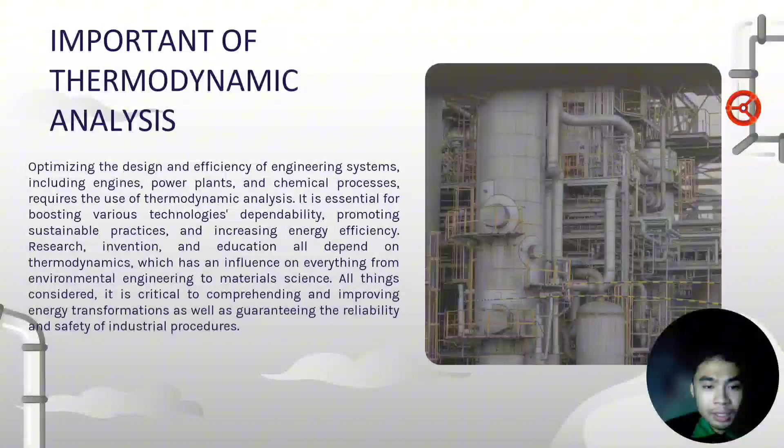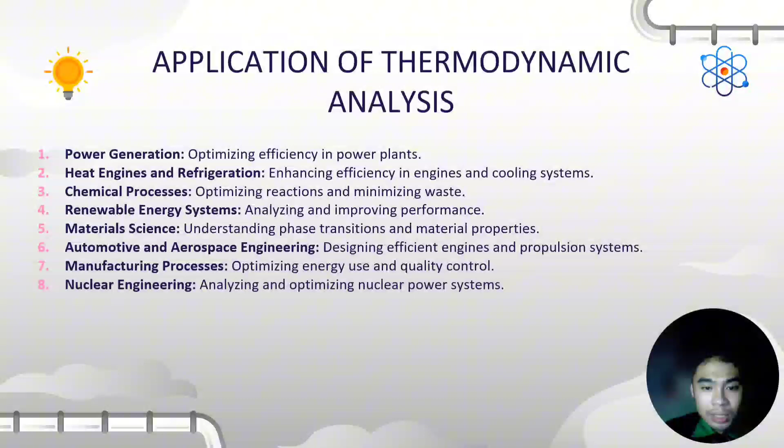Next, automotive and aerospace engineering, which is designing efficient engines and propulsion systems; next, manufacturing process, which is optimizing energy use and quality control; and lastly, nuclear engineering, which is analyzing and optimizing nuclear power systems.

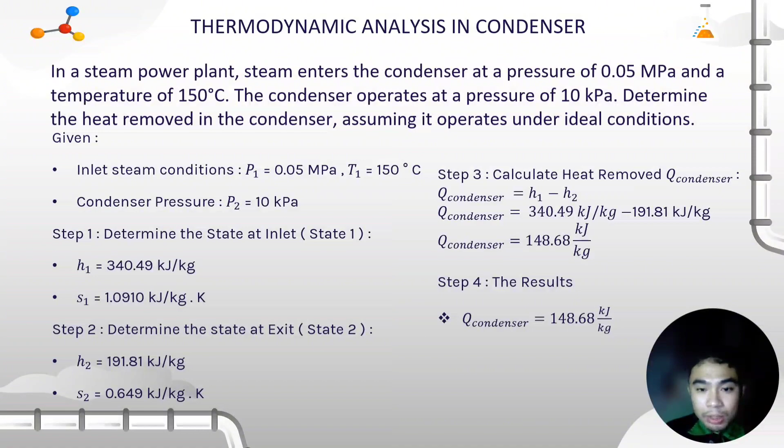Next, for step 3, calculate the heat removed, which is the Q condenser. Q condenser is equal to H1 minus H2, and we will substitute the values that we get at state 1 and state 2, which is 340.49 kJ per kilogram minus 191.81 kJ per kilogram, and the final answer is Q condenser equal to 148.68 kJ per kilogram.

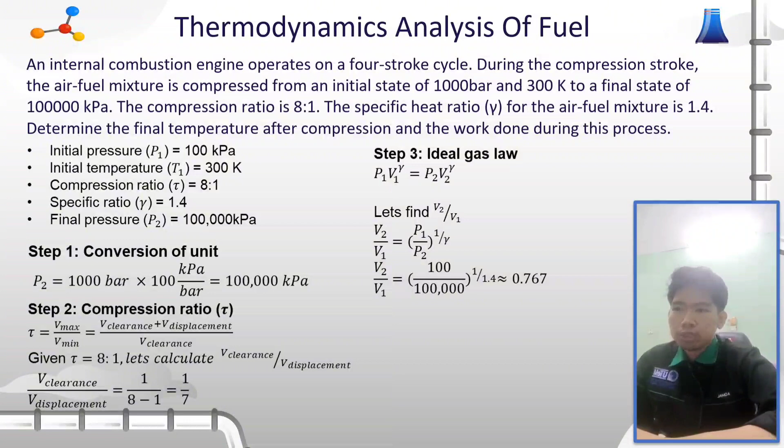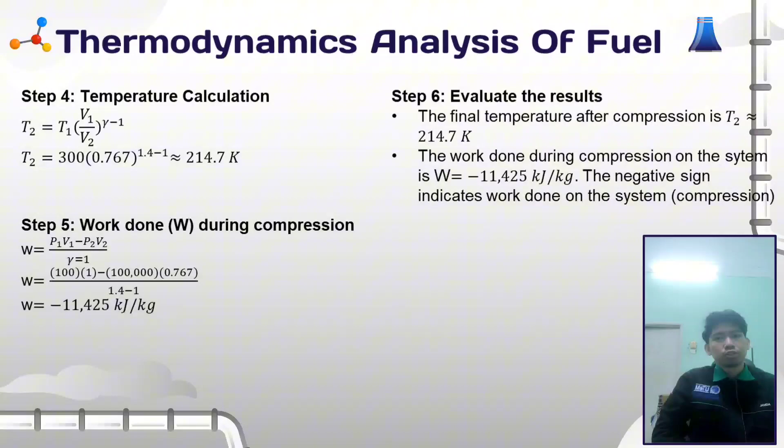Hello, my name is Muhammad Sulaiman. Now I want to present an example question of thermodynamics analysis of a feed water heater.

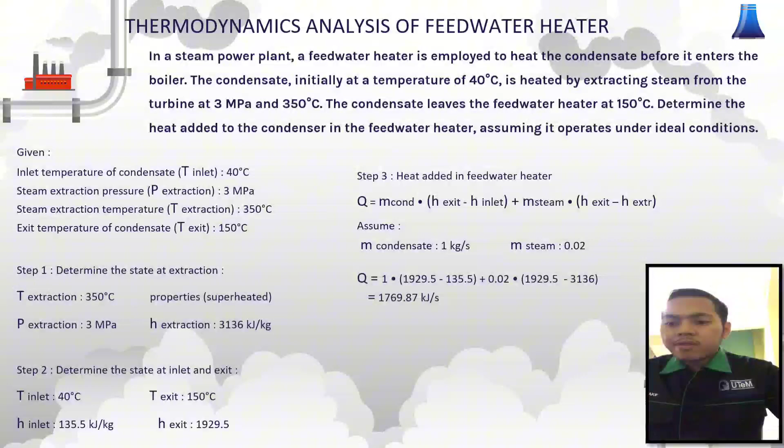So step 3 is heat added in the feed water heater. The formula is Q equal to mass condensate multiplied by h exit minus h inlet plus mass steam multiplied by h exit minus h extraction. So we assume mass condensate is 1 kg per second and mass for steam is 0.02. So we put the information into the equation and the final answer we get is 1769.87 kilojoule per second.

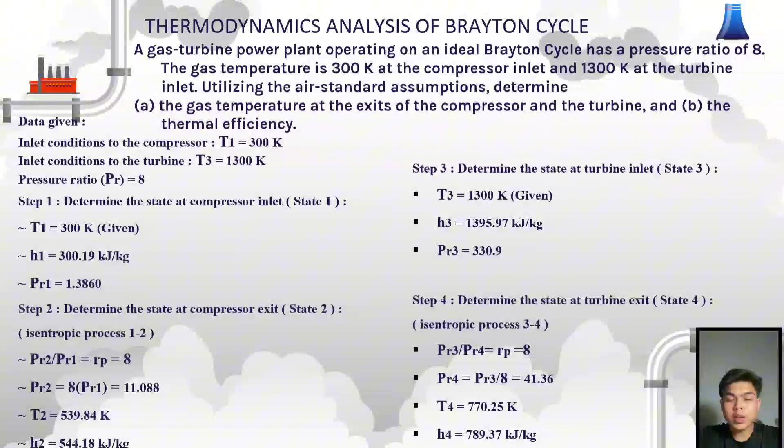For the next question, we need to determine the thermal efficiency. We can use the formula, which is W net divided by Q in, or 1 minus Q out divided by Q in. To find Q out, equal to H4 minus H1, and after substituting the value, we get Q out 489.18 kilojoule per kilogram. For Q in, the formula is H3 minus H2. And after substituting the value, we can get 851.62 kilojoule per kilogram.

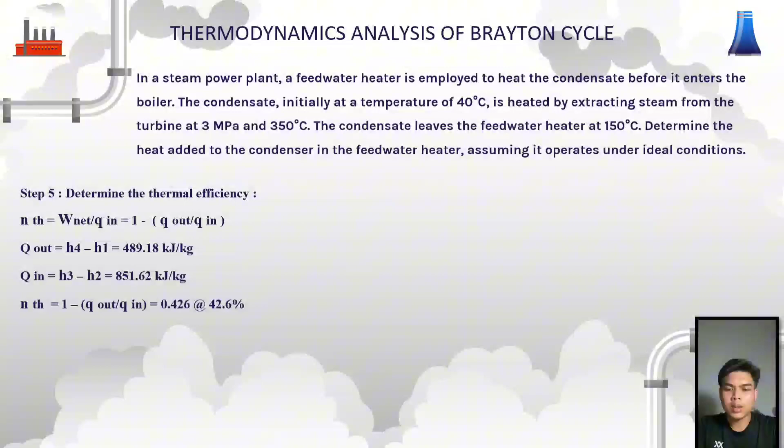Then for the thermal efficiency, which is 1 minus Q out divided by Q in, we substitute the value and we can get 0.426 or 42.6%. Now, I would like to explain the example question for thermodynamic analysis in a combustion chamber.

The question is, a mixture of methane CH4 and oxygen O2 is burned completely in a combustion chamber. The balanced chemical equation for the combustion reaction is CH4 plus 2O2 gives CO2 plus 2H2O. If 2 moles of methane are burned under ideal conditions, calculate the heat released during the combustion process. Given the standard enthalpy of formation: CH4 equal to negative 74.8, CO2 negative 393.5, H2O negative 285.8.

So for this question, step 1, we need to determine the enthalpy change, delta H. As shown in the figure, CO2 plus 2 H2O minus CH4 plus 2 O2. So we just put the values given into the equation. So it will be negative 393.5 plus 2 multiplied by negative 285.8, minus negative 74.8 plus 2 multiplied by 0. So the final answer for enthalpy change delta H will be negative 898.3 kilojoule per mole.

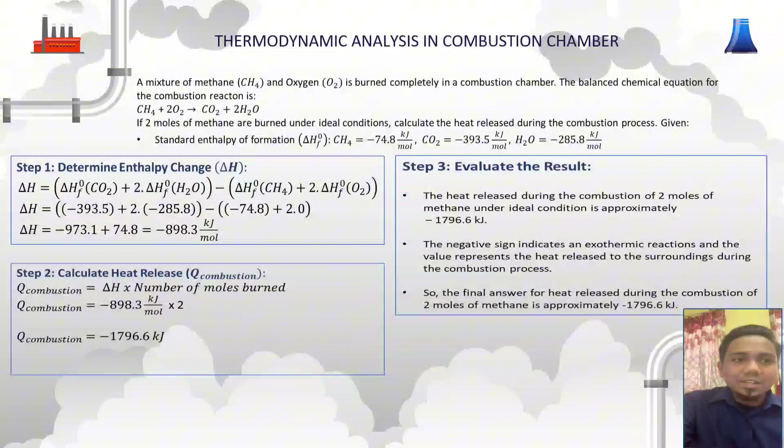So for step 3, we evaluate the result. The heat released during the combustion of 2 moles of methane under ideal conditions is approximately negative 1796.6 kilojoule. The negative sign indicates an exothermic reaction, and the value represents the heat released to the surroundings during the combustion process. So the final answer for the heat released during the combustion of 2 moles is approximately negative 1796.6 kilojoule.

And lastly, part 3, which is the conclusion. To sum up, thermodynamic analysis is a basic and adaptable method used in many different fields of science and engineering. It has an impact on a variety of sectors including environmental engineering and power generation by facilitating the optimization and understanding of energy related to the process.